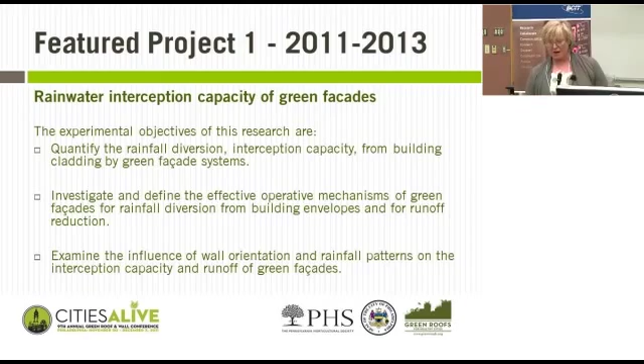There was thought to be some very big benefits on the water balance and the protection aspect for the building. So we said, let's understand this and quantify if there's really a rainfall diversion that will actually protect the building envelope system. We define that by interception capacity. And if there is, in fact, rainwater interception, what are the mechanisms of these systems allowing for it? We wanted to understand how wall orientation and rainfall patterns would affect the capacity of these green facades to protect the building.

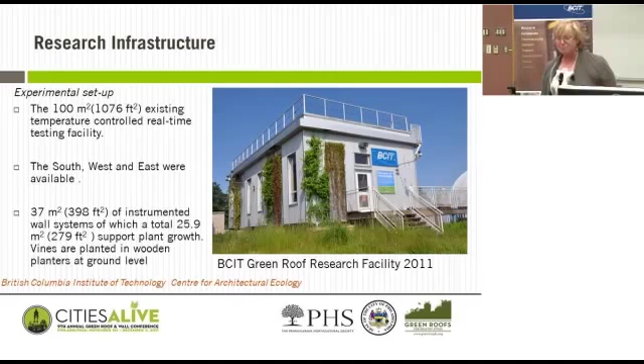So what we had for the experimental setup was the old research center. We took all 4 aspects, but actually only 3 of them were available to us in the end, to attach different types of green facade systems. Overall, we had close to 400 square feet instrumented with a total of 300 square feet of vegetation. We also had our reference plants as well.

The green facades, to be really clear, are systems where the plants are climbers, and they climb up either cables, or a net that's in tension, or a 3-dimensional rigid grid structure. So the English building has climbers - it actually has great climbers that grow up the facade itself. And all we're doing with the green facade is moving it off the building, putting another structure 8, 10, or 20 centimeters in front of the building.

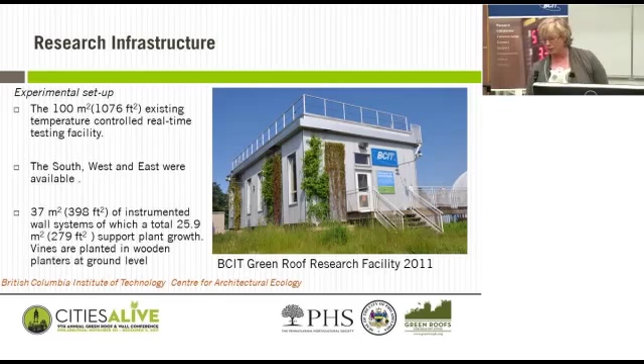So is that going to help? Having taken these different systems - and you'll see the actual suppliers' names that donated their products and funded us - we took the different systems and associated with them different types of plant species most appropriate for the technology, whether it be a cable or a net system. And then, of course, we had to set up our reference walls.

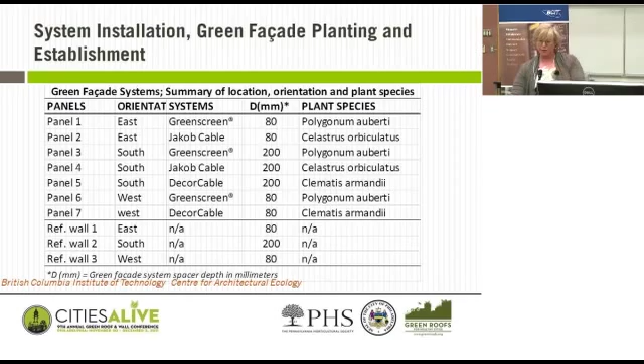We first defined what the interception capacity was. It was simply the difference between the rainfall which would come off a regular wall, the panel next to it, and the wall which was behind a vegetated screen. So it was the difference between the two.

We needed our weather station data, which was on top of the research facility anyway. And then we created micro-weather observatories for every facade - south, west, and east - that gave us our wind, temperature, relative humidity, and other parameters. The panels themselves were instrumented in subzones of 3 - bottom, middle, and top - for temperature and relative humidity. And we devised a system to measure the runoff coming from behind the panels.

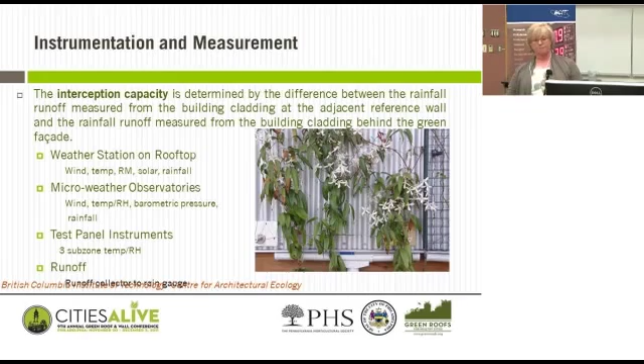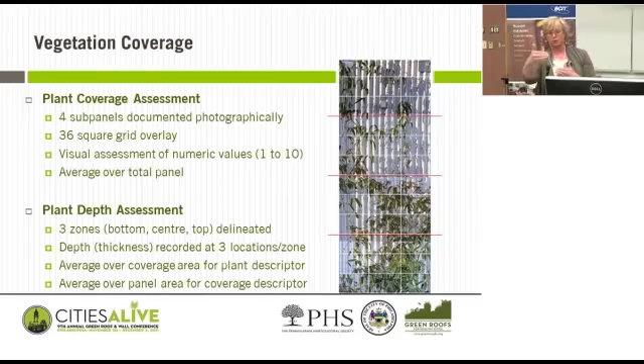Now what we needed to do is correlate the system in its confounded state with the plant species and the coverage of plants on the system, as well as we defined the coverage in terms of area and in terms of depth. I won't go into the details.

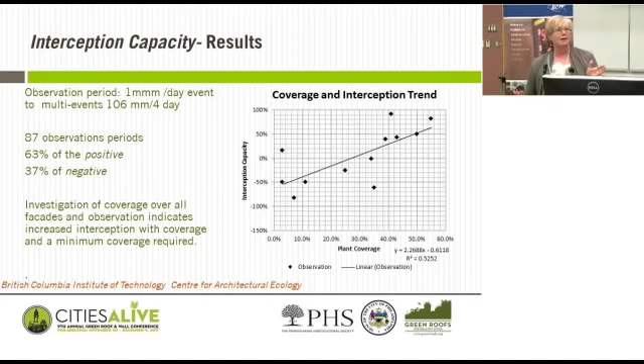What we end up with is looking at rain events that went from our lovely little drizzles of 1 millimeter in a day to 106 millimeter events. Over 87 observations, we were able to see that 63% of the time, we had something we'd call a positive interception - 63% of the time, there was less rain hitting the side of the building when you had a vegetated screen. But in actual fact, 37% of the time, there was more rain on the facade, and we had to start to deal with that.

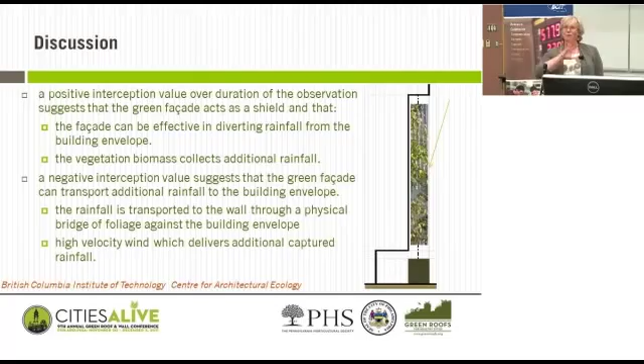We then decided to call this - we were a bit surprised here. We thought we'd always be shielding the building, that it would always be a better solution. But it's not. So the positive interception is what's happening when the building is shielded and we're diverting the rain from the building. That's we think is good, right?

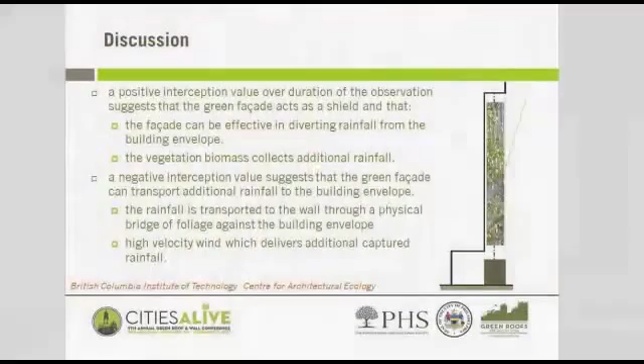But the negative interception, something else was happening. The biomass is collecting the water. The wind is tossing it on afterwards. The biomass was acting as a bridge and directing water directly onto the facade.

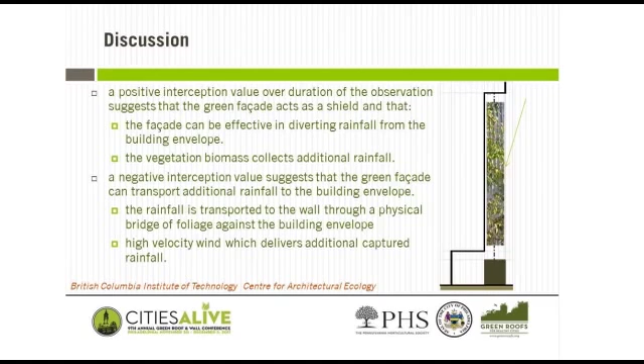With a statistical analysis, and I'd like to credit Caroline Houston for joining us with that, we were able to determine that once you got up to around 34% of vegetation coverage, you had a 50% possibility of decreasing the amount of rainfall on your roof, on your wall. But until you got to that high level of coverage, you were actually delivering more water onto your facade.

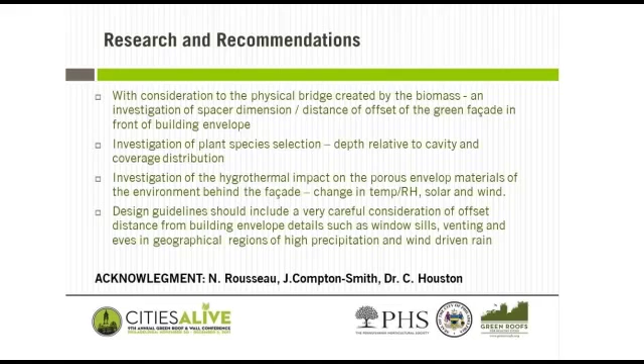Now with that piece of information, we're armed with some issues here. How do we reduce the physical bridge between the biomass and the facade? How do we protect vulnerable building envelopes? And how do we deal with the fact that we've created a new environment between the green facade and the building that has increased relative humidity, decreased temperature, decreased wind, decreased solar radiation, and we're delivering more rain onto the facade? So we now have to start to investigate a new design and new guidelines for pinning the green facades onto the buildings. So that was one project.

The second featured project was on sound absorption of vegetated roofs. This was important to look at how we can reduce noise pollution in urban areas and how we can increase the potential to inhabit roofs.

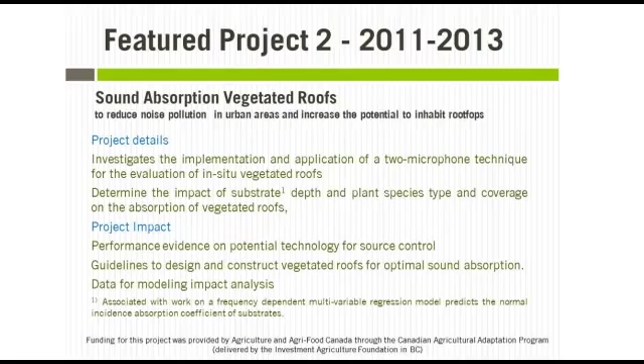So why is that important? Well, I'm just going to go back really fast in history. We used to use roofs. We lived on roofs. We had picnics on roofs. We had our barbecues on roofs. They slept on roofs. In Algiers, all the fancy people used the rooftops for transportation, and it was the soldiers and the cattle that used the streets. We used rooftops. And when we got in, as far as the 20s, we had Otis's elevator. He had his elevator up there. And all of a sudden, the rich people were accessing roofs.

The hygiene precept came out of Dresden that said roofs are a good place to inhabit because the air is cleaner, the views are better. So next thing you know, we had sanatoriums on roofs, we had children's playgrounds on roofs. Then we had a few wars came into place, and so did advancement of mechanical engineering systems. And where did they end up? They ended up on the rooftops.

So from the 50s to about now, the rooftops have been relegated to mechanical systems. Now we're in a situation of high density where we have to take back the rooftop and inhabit the roof. But we've created a problem up there - we have a lot of noise. So the idea about using absorption of green roofs to reduce noise is what this project was about.

And we wanted to be able to investigate if, in fact, green roofs would reduce noise which diffracted over the edge of a building, and if it reduced noise which is propagated along the rooftop of the building from a mechanical system.

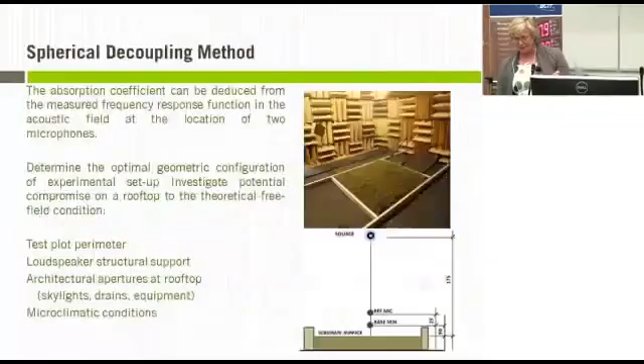So the first thing we have to do is figure out how to test this. In an anechoic chamber at UBC, I was able to use a 2-microphone technique in which I used a loudspeaker normal to the green roof - this is an exact replica of a green roof inside the anechoic chamber - and deduce its overall normal absorption coefficient from a transfer function.

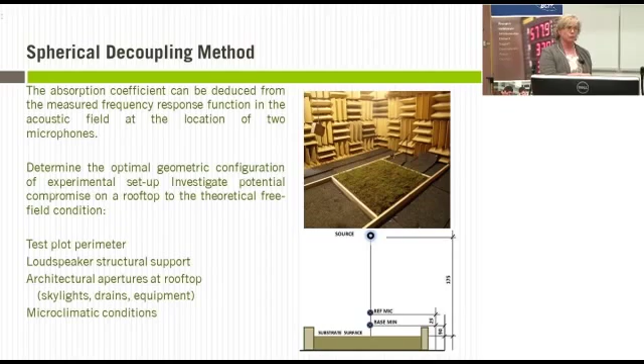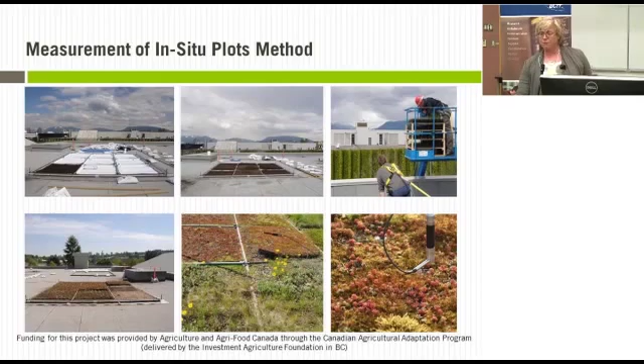I wanted to first design a system of evaluation and then take it up onto a rooftop. The problem is when I go up onto the rooftop, like this one at the Elevated Research Platform here on campus, is I have all sorts of things - I have parapets, I have dividers between the different green roofs, I have wind. So it first had to be evaluated in an anechoic chamber as a method for evaluation, then went up onto what is now going to become the Elevated Lab and devised 25 different plots of varying depth and plant communities, and evaluated their absorption potential.

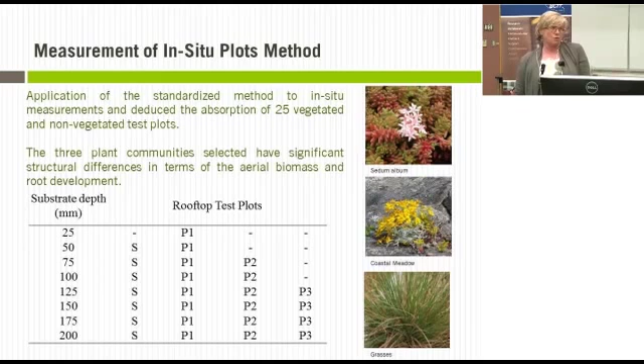As soon as we introduced the different plant communities, the data became quite a bit more skewed, and for real obvious reasons, such as the fact that our mosses, our bryophytes that tend to grow in with our sedums, actually have a very short root length, and it keeps the water up to the top surface of the vegetated roof.

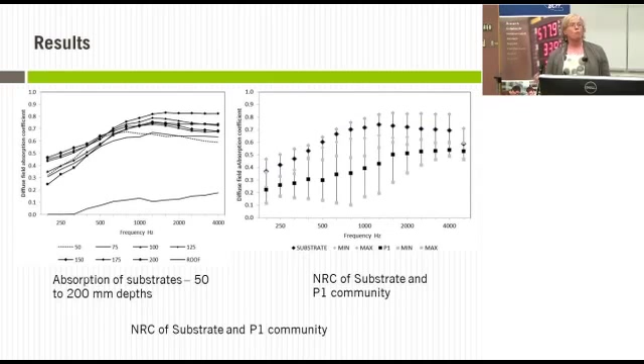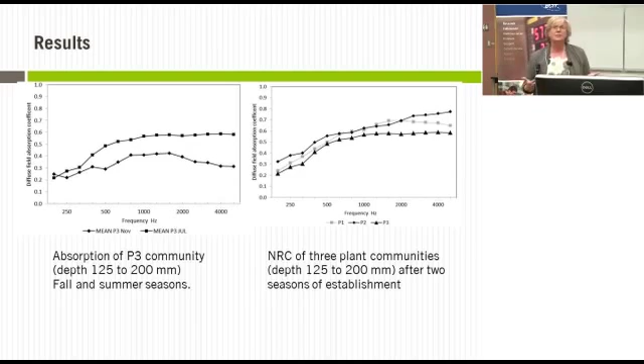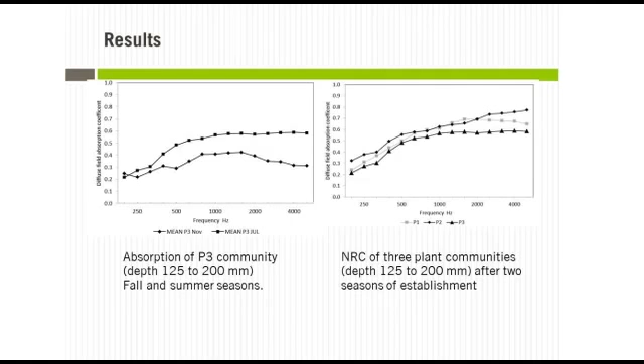Plants that allow water to descend through the depth of the substrate will behave differently in terms of their capacity to absorb sound. Whether it's summer or winter had a significant impact. We certainly have very wet green roofs here, and with that amount of rainfall, they're still absorptive in the realms of 30-35% in the winter, but in the summer they increase substantially in capacity. After two years of trials, it really didn't matter when averaged over the year what type of plant community you use—we could still see 20 to 80% absorption of sound.

I'd like to acknowledge Nicholas Rousseau and Dr. Murray Hodgson for their assistance on this project, and move on to the next.

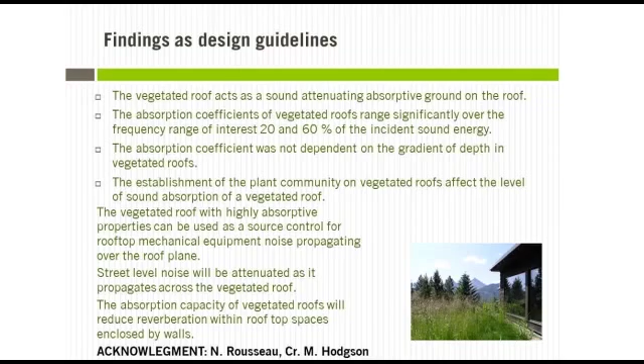So the list of future applied research projects—these are the funded research projects we have. One is the sound living in Vancouver's laneway housing, which I'll detail.

A second is a vegetated noise barrier, which quantifies the soundscape, using very objective acoustical and spatial material parameters. So we say soundscape, but it's not way out there—I'm not listening to the sounds of whales as they move by a vegetated noise barrier, but trying to actually quantify it by looking at anthrophony and biophony sounds, using different frequencies and FFTs to determine if the vegetated noise barrier will introduce more natural sounds into the environment.

The other project, which is quite interesting, is the impact of living walls on room absorption, reverberation time, sonic subzones, and speech intelligibility, funded through NSERC Create at UBC. Also in collaboration with Karen Bartlett at UBC, who's in SPPH, we're looking at indoor environmental qualities—her interest being VOCs, CO2s, and endotoxins.

I'll highlight the elevated lab. The first featured project is sound living, the acoustical quality project. What's happened essentially is that in our jurisdiction of the Lower Mainland, regulations require that as you move into multifamily housing, you need a certain acoustical quality in your residential unit. In terms of traffic sounds, you can only have about 45 decibels in your kitchen, 40 decibels in your living room, and only 35 decibels in your bedroom. To get a permit to advance a CD1 comprehensive rezoning, you have to prove that, and we have processes in place to do so.

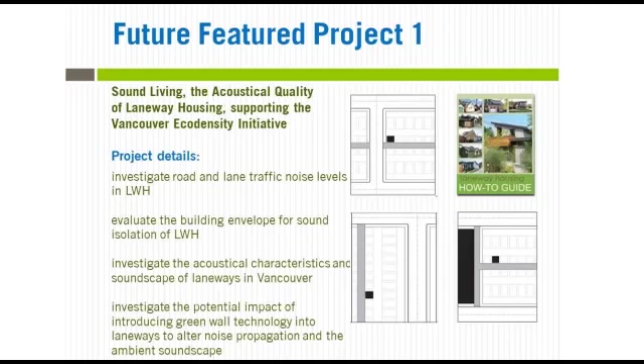And then we know that we can provide an improved acoustical environment and meet the World Health Organization criteria. Those are just some of the images on the laneway house.

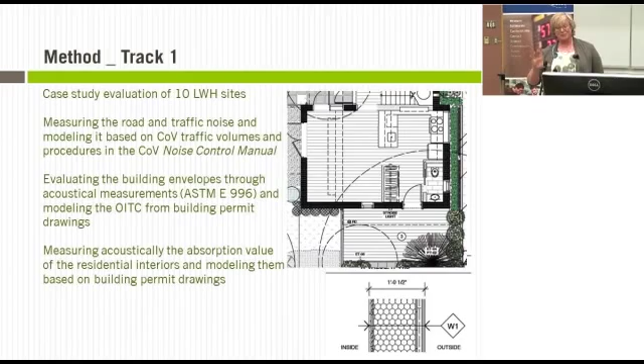The students working on this project are evaluating the envelope and evaluating noise propagation as it moves through the laneways, whether it's a cottage laneway or a canyon laneway, depending on what side of town you're on.

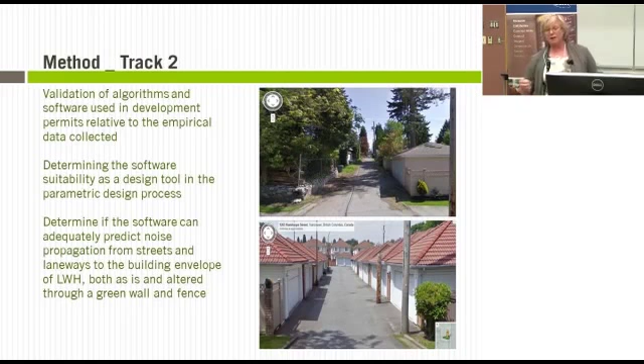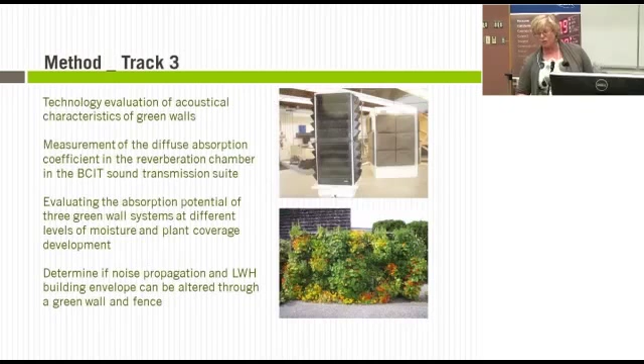We have to validate the algorithms and software typically used to predict traffic noise inside a residential dwelling. And then, of course, we need to understand the absorptive characteristics of green walls, not unlike those of green roofs. We can use the same type of methods to see if, when we feed those into the models, we can reduce the traffic noise inside the laneway house.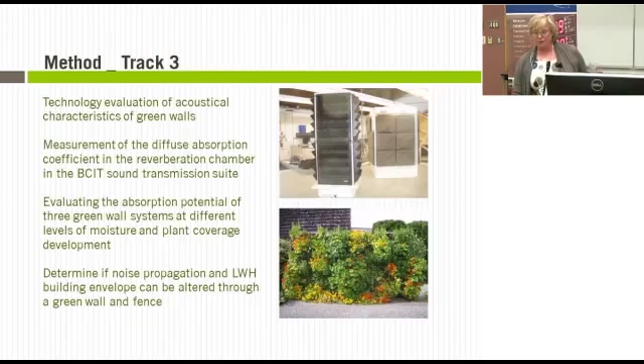We have to acknowledge a lot of students who have worked on this, most in particular Rosa Lynn, who's a grad student in the Masters of Applied Science program.

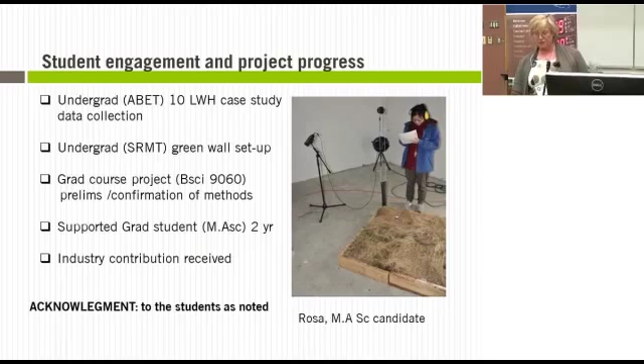So the last featured project here is the new Elevated Lab. That fantastic research center we've had at the Great Northern Way has come to its conclusion. We thought we had 4 years, but we had 11 years down at the Great Northern Way site, and now it's being rebuilt as the Emily Carr University. I had been up on the elevated research platform for about 4 years doing different types of research work, and now we realize we're going to relocate the functionality of the GRRF to the elevated lab.

So it's 13 times bigger, number one. It's in Burnaby, number two. Most important is the access to students and the access to other faculties for collaboration. I'll run through the 9 or 10 projects here and show you some images, flipping back and forth.

The first thing is when you access the elevated lab from Smith Street on the north sector of BCIT campus, there's going to be a living wall, which is 25 meters squared, supported by harvested rainwater.

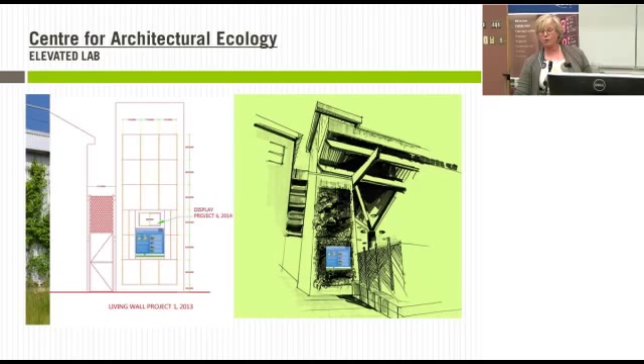Second, there's going to be a green fence. The green fence is a prototype design for planters, and we know there are some new planters running along Smith Street. They're going to be a little different — planters representing some aesthetics of BCIT that we'd wish to promote, but also projects for students in steel fabrication and carpentry.

And the other thing you'll see at that base, aside from the living wall and the fence, is a display monitor which will show real-time data on stormwater and thermal performance. So that's the refunctioning of the Research Center at Great Northern Way to here.

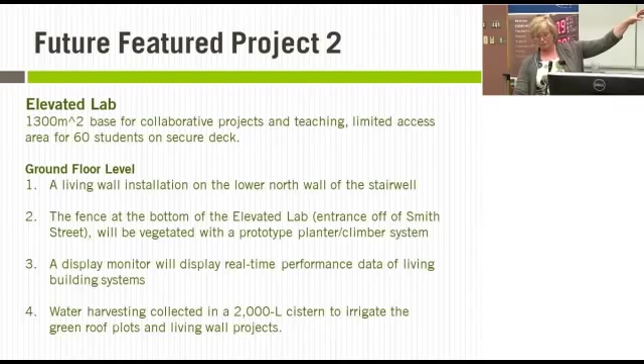Up on the roof level, we'll have the green facades shown earlier on the stairwells. The upper roofs will be used for research on thermal performance and stormwater, moving over that functionality. We'll have an interactive living wall which students can engage with, whether looking at particulates, thermal performance, urban heat island, acoustics, or plant viability.

It won't really matter — the idea is this is infrastructure accessible to the School of Construction and all the other 5 schools we have on campus. There'll be an interactive green roof plot where students in the GROW courses will be able to get their hands dirty once again, as we did on the Great Northern Way campus.

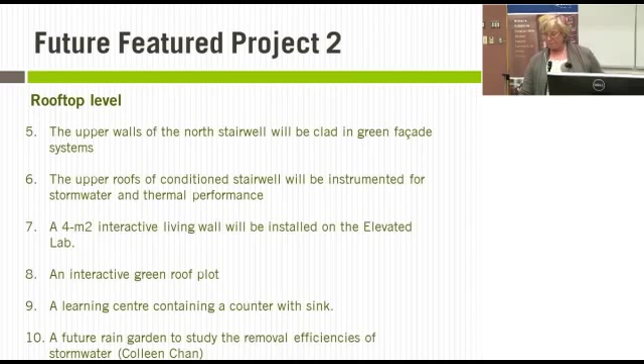We have a beautiful learning center just finished by Eric Hiob and Steel Fab, which will make a classroom up on the roof. And then there's going to be a future rain garden for studies by Colleen Chan on removing particulates from the stormwater, which she doesn't want there.

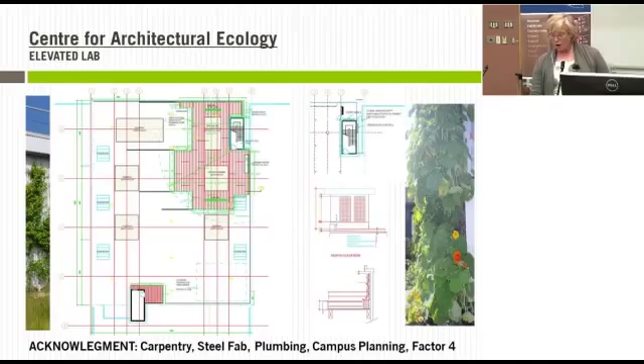So what that's going to look like is an area of the elevated lab of 1,300 square meters, limited to a maximum of 60 students on the roof at any one time, and they'll be secured with handrails.

The acknowledgements to date go to the whole School of Construction. Carpentry, steel fab, and plumbing have already come to the table helping to install the deck, build handrails, build the learning center, and plumb in the rainwater harvesting system. Campus planning has been involved as well, and the Factor 4 group has put in some capital money for this.